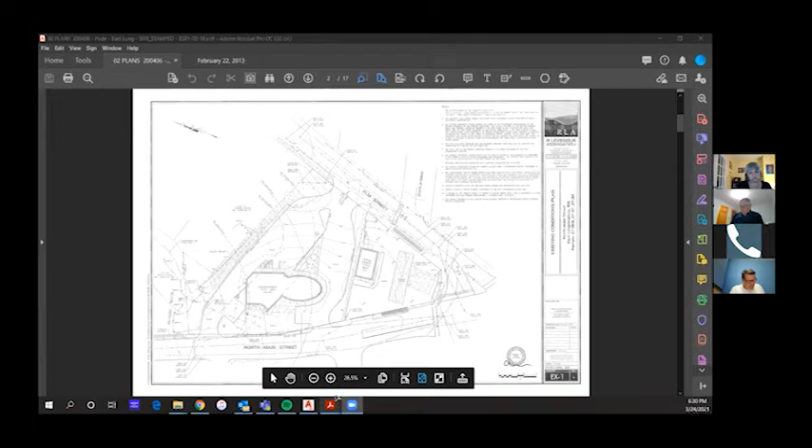It's yours, Craig. Thank you, Jeff. Rob, Felipe, you have the floor. Thank you, sir, I just want to make sure we're ready. Okay, so I'll start and then Philippe could get into some of the detail on the drainage. So what you're looking at, well first of all, for the record, Rob Levesque from Levesque Associates, also Philippe Cravo from Levesque Associates.

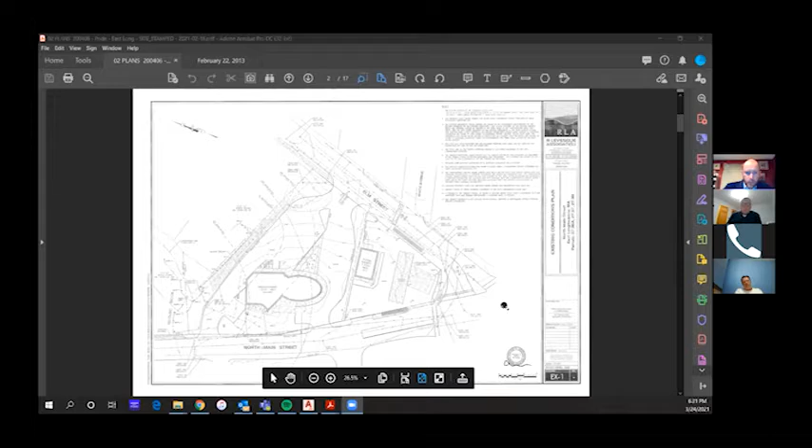We have a project before you for the demolition of the two existing structures on the two adjacent parcels at the corner of North Main Street and Elm Street. There is the old Ramitos building that you see on the left with the oval and the extension we just talked about with the certificate of compliance. On the right-hand side, we have the existing Pride gas station, a former gas station purchased by Pride. So Pride now owns the two parcels and is looking to redevelop them.

So they will demolish the existing structures and redevelop the parcels to include a mini supermarket and gas station; the property is zoned for business. The existing gas station and the Ramitos building get removed. You should still be able to see the existing buildings here, there's a bit of an overlay so you can see where the Ramitos building was, just for reference, in addition to the gas station building. So those will be razed. We propose approximately a 6,000 square foot mini supermarket, traditional to what you see with a newer Pride store, and a gas canopy with four islands. There are also provisions for parking throughout the site, as well as vehicular circulation in and out.

We have filed this as a redevelopment project. We have, as you're aware, Pecousic Brook, which is a perennial stream, and with that comes a 200-foot riverfront area. It is a very restrictive zone for any development within that area. There are provisions under 310 CMR 10.58(5), I believe, for the redevelopment of properties, and DEP allows this — the commission may allow this subject to improvements on the subject parcel.

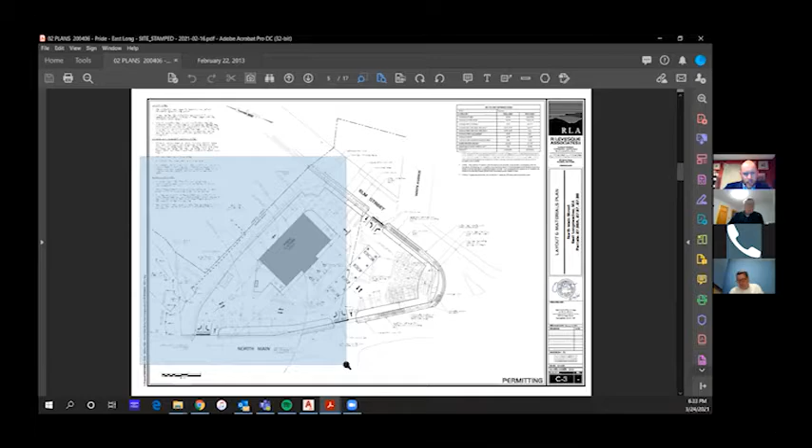For example, moving slightly away from the riverfront area, water quality improvements, other plantings and mitigation have been requested by commissions in the past. So what you see before you this evening is a layout — if Philippe could zoom in on the left-hand side — this layout shows the riverfront area is on the left-hand side, you'll see some flags there. That's the riverfront area.

And then the mean annual high water line of Pecousic Brook is right where Philippe's cursor is now. There's a little intermittent bank and then a head wall right there — that's an existing concrete head wall shown on the plans from 2000. So that was an addition at that point.

We're actually, as Craig mentioned, moving away from the riverfront area slightly. We're not planning on impacting any area arguably beyond the existing edge of pavement. If Philippe goes down to the left near the entrance, over near the riverfront area — see that edge of pavement? There's an existing, very light line for the edge of pavement that's currently there. We're moving that over ever so slightly, but we are moving slightly away from the riverfront.

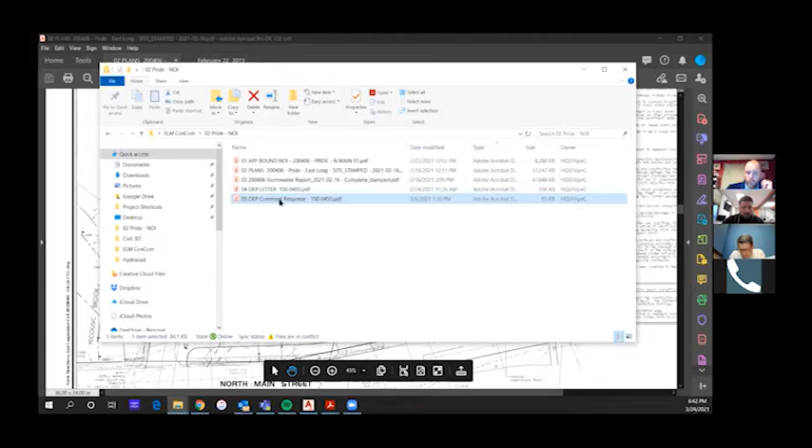We'll have to check what number 5 was. Let me see what we got there. So I just pulled up a response letter that Ryan had put together. Yep. So I think the interpretation was that was a proposed head wall.

So being an existing head wall, it would not be a new point source discharge to the resource area. So under the proposed condition, we're using the existing head wall, and it does not need to be altered. Not being worked on, so then it can remain, as Stinson said. Okay, thank you. Yes, sir. Thanks.

And you feel very, you can assure us that you're making every effort to be sure that no oil gets into the brook, into the stream? Yes, that's correct. And there's a very specific protocol.

Bob Bolduc was very helpful. We're working with him on a few projects, and one of the projects he explained is that the new canopy systems that they have are very responsive to any of that type of stuff.

There's obviously very specific state requirements as far as the pad below the canopy. You've probably seen some of those - what's the term - grooves in the concrete in those areas at a gas station. Those are actually sized based on a certain amount of volume to allow if there was a spill. I couldn't tell you the specifics of the volume, but the state does regulate how those are created and what those grooves can contain.

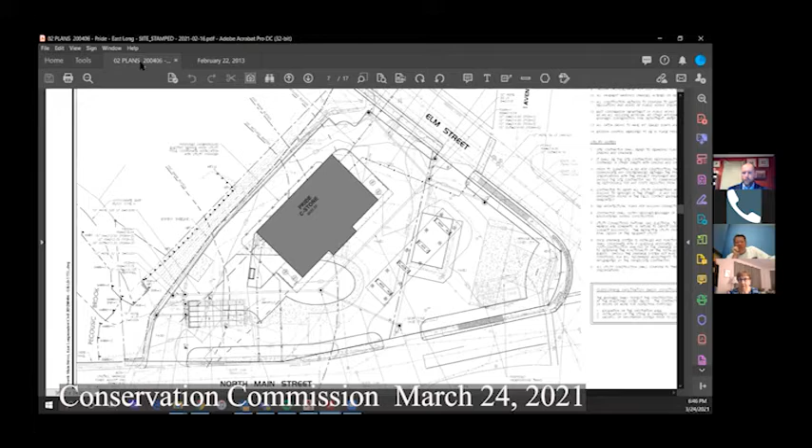Relatively speaking, I believe these tanks were replaced a short period of time ago. And you are replacing them again? No, I believe they'll be able to utilize the tanks that were just recently installed, but they meet the new standards that came out.

Any other questions or comments from the commission? I was satisfied with that. Thank you, guys. Thank you.

I just wanted to bring up that if there are more plantings going on here, we're not really increasing the amount of impervious surface, correct? Philippe, can you confirm that? I don't think we are, but I don't want to speak out of school. No, it's very close, we are a little bit - maybe about 1,200 square feet. It was an increase, but a very small one. And there's an increase in square footage of the building going from the two buildings to the one, but that's also fairly small, correct? We're at 6,000 now, I'm not sure what it was before, I don't know if we quantified the existing buildings.

The Ramitos building, believe it or not, was pretty good size, and it's probably pretty close if you can actually see the other ones underneath. That's what I came up with when I tried to do some numbers, but it seemed pretty close to me. Yeah, I would agree.

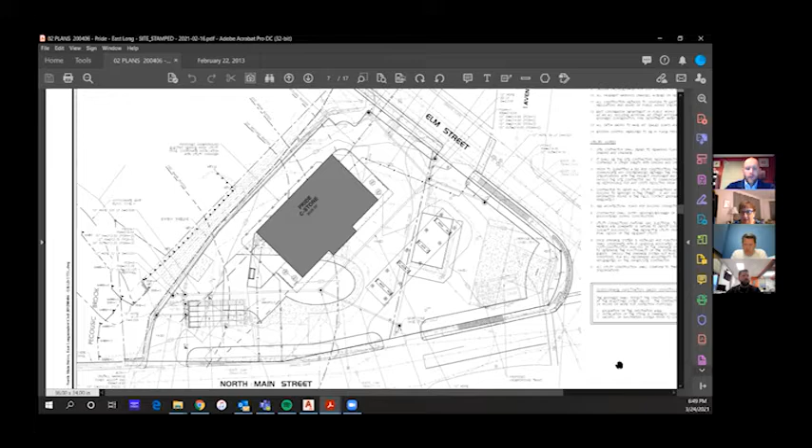There's some other landscaping in front of the existing Ramitos building and a little bit of lawn area. That will be asphalt now, but there will be a grassed strip along the entrance, along the frontage there, so there will be landscaping proposed. It's pretty extensive. I'm interested in making sure that towards North Main Street there's some beautification, that we don't completely have asphalt to look at when we drive by there. It's a very imposing site, right there in the center of town. It's hard to miss.

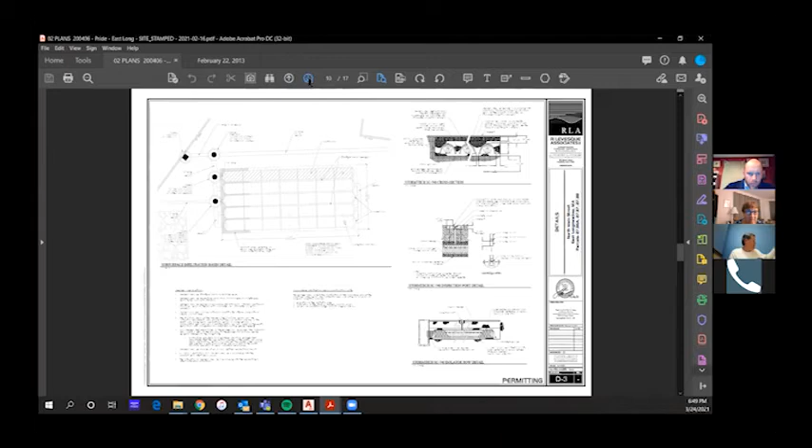Very good, thank you, I'm happy to see that. And essentially what's coming out is the strip of grass between the existing station and Ramitos. Yes, and also a little bit in front of Ramitos. Yep, you're accurate, yes.

However, I will point out that you're also greening two areas. The first entrance off the rotary going into the Pride Station will be moved back considerably, and you're losing one entrance there and one on the opposite side from Elm Street, which will be more grassed in. So basically the entrances and exits are moved further back.

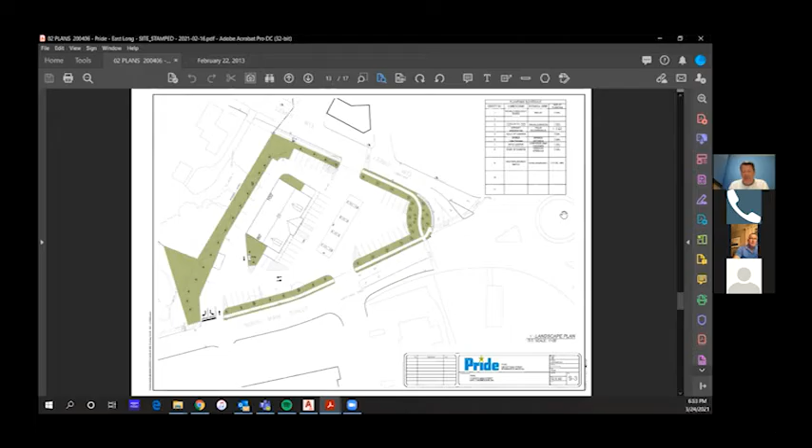At this time I will entertain a motion to close the public hearing. So moved, seconded, okay. Roll call vote to close the public hearing. Jeff, aye. Francis, aye. Tony, aye. Will, aye. Tom, aye. Elizabeth, aye. And I am a yes vote also.

So now one more time back to the commission. Personally, I don't see any big issues with this. It's pretty much a trade-off. It's gonna be a newer, better facility, and we'll get rid of the vacant eyesore. I don't particularly see where we're causing any real impact in the resource area, because there's really not anything happening outside of where the existing curbing is. There's gonna be a little bit of work on the curb where it gets moved, but there is erosion control for that.

So basically, as far as I'm concerned, I don't have any issues with this, but other commissioners? I'm good with the plan. Anyone else? I'm all set.

Okay, I will entertain a motion for the approval of the notice of intent filed under DEP file number 150-0455. So moved, seconded. Any further discussion? Hearing none, roll call vote. Jeffrey, aye. Francis, aye. Tony, aye. Will, aye. Tom, aye. Elizabeth, aye. I am a yes vote also.

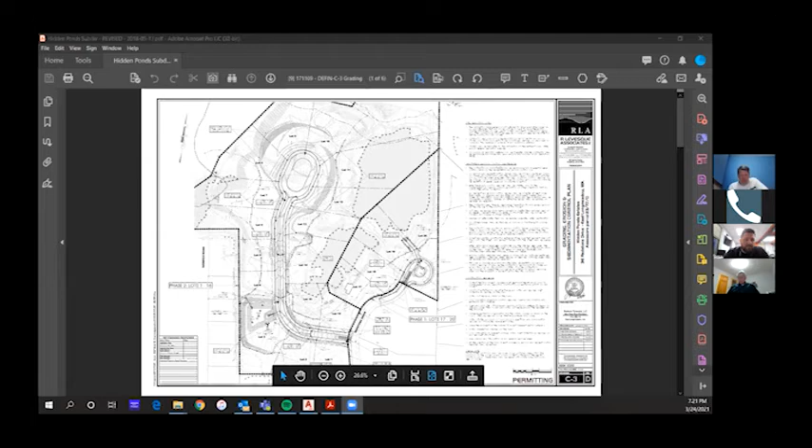So this basin here is what we want to talk about. Let me just go to the sheet that blows it up. From the site visits I've done, most recently back in January, it seems to be in general compliance with the shape.

Once the subdivision goes into the transfer to the association or the town, we're going to do an as-built of the entire subdivision to verify that the edge of pavements are installed as proposed, and that the basin was constructed with the elevations, outlets, and everything shown here.

From my site visit, a couple things I did locate - I was able to find the dry wells that were installed in the basin, and the outlet control structure. One thing I noticed is that the outlet control structure, detailed here, has an orifice that's a maintenance orifice at the bottom, which should be at grade with the bottom of the basin.

That orifice is there in case something happens to the basin and it fouls up at some point, so they need to get the water out. There's a plug down there, just a cap, a screw cap on a PVC outlet pipe that under any normal condition does not let water through. That plug was not there, and that's what I think was creating a lot of the discharge from the basin that probably shouldn't have been occurring up to this point.

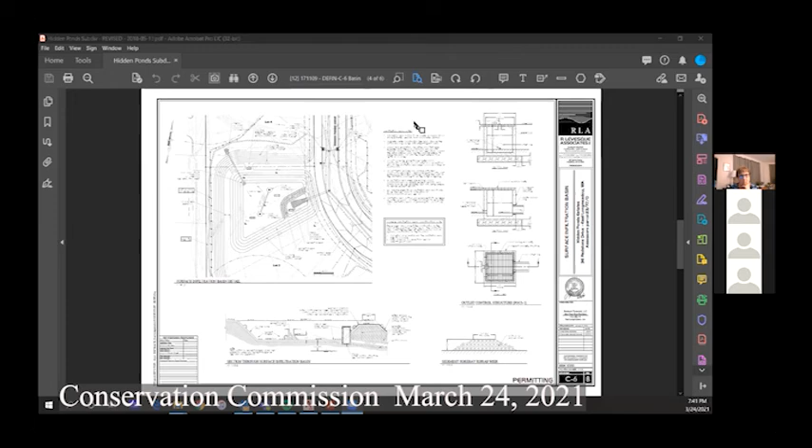We have had a problem with those. We've tried a number of things, and all the water collects at the bottom of the street right near the basin. Even changing out the sacks and cleaning the sacks, I've used different types of sacks. If they get clogged at all, which they tend to get clogged, then the street floods. This has happened a couple of times, and the street flooding just makes a huge mess everywhere. So we haven't found an easy way.

I've got those orange sacks that you purchase that are made specifically for it. Well, they clog very easily. And then I've used filtration fabric, but that doesn't let the water through quick enough, so it fills up, and then it just passes all the way down to the bottom of the street.

I've used silt fence, but the silt fence is so slippery that it just kind of slides into the catch basins. I've tried putting wattles around them, but that just dammed the water and that flooded the street.

So I think what I'm hearing is that there's a lot of sediment reaching those catch basins, which would make you want to control it closer to its source. So when someone's excavating for a foundation, or spreading, or just doing earthwork on the individual properties, I think that's one spot that could be a higher source control opportunity. Whether it's silt fence and hay bales, I think we've got to make a bigger attempt at the source before it gets to the catch basin.

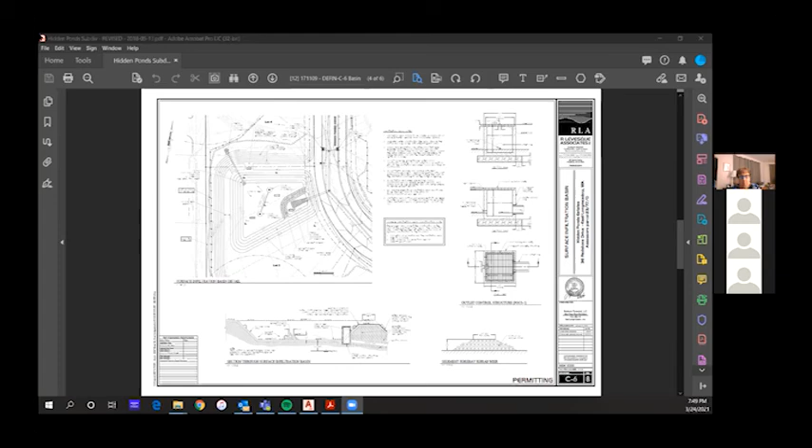Going back to Hidden Ponds project monitoring, I had one other stop. I think it was last Sunday after I picked up my packet over at Jeff's house, and I stopped by the Robin Road site, Ralph Capua's project, and I noticed two things. We kind of need to send him a letter. Currently there's no existing flagging up for the wetland, all the flags are gone, and he does not have a DEP sign up.

So we need to send him the friendly letter to take care of that. The other one we had to talk about, I don't know if Rockies is the name of it or what, but the letter did go out. Yeah, what was it? Oh, East Longmeadow Center Village LLP.

And everybody saw the pictures of the litter and the situation in the basin back there. I suppose we just need to wait until our next meeting to hear from the owner regarding this, unless anybody has any other comments they want to add to it. No, I think the letter pretty much covered it, clean it up. It's a mess.

Through the chair, Greg. Yes, sir. Okay, the major issue was not addressed, I don't think. I got a copy of the letter about the grease in that basin. I know it's been an ongoing thing, and that holding container he has for grease and oil is sitting right over a storm drain. When I was there the last time, and the first time, it was full, and the whole container itself, the outside on the parking lot, was all grease.